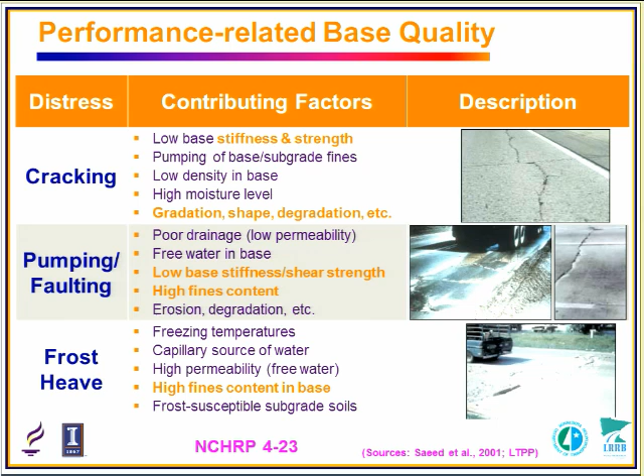According to the NCHRP 4-23 study, pavement distresses can be related to base quality, especially stiffness and strength. This summarizes some critical aggregate properties related to pavement performance. As you can see, shear strength and stiffness are among those aggregate properties, and gradation is almost related to all of the aggregate properties. That's why we need to have a better understanding of gradation mechanism.

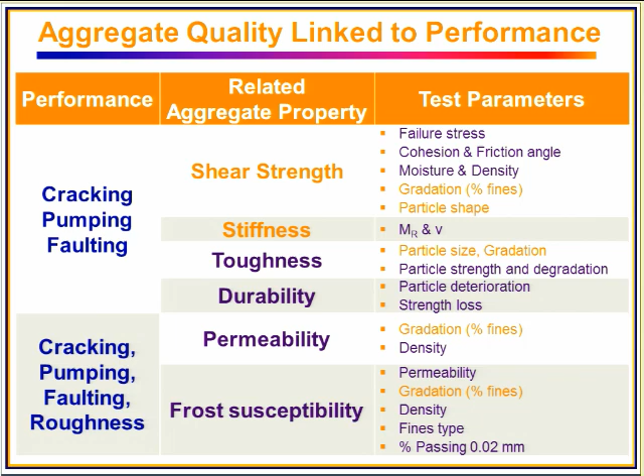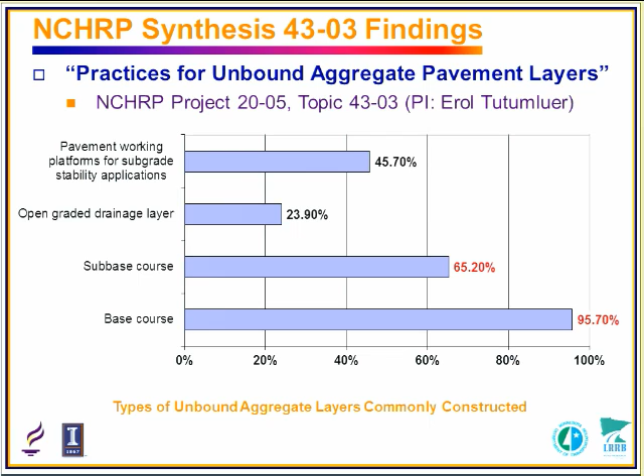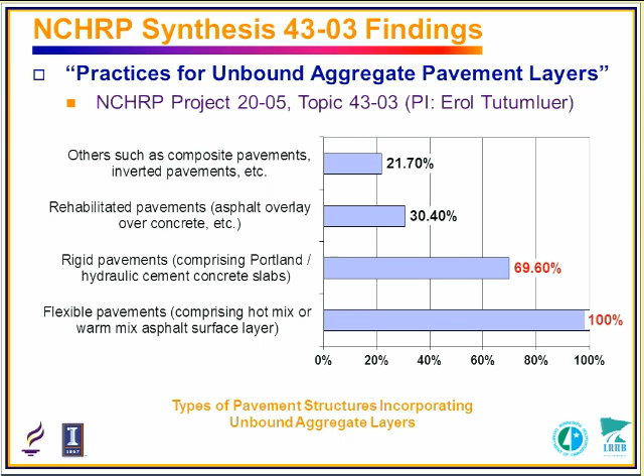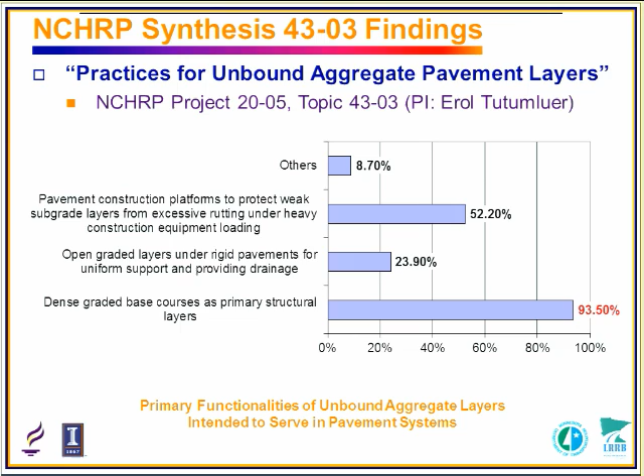Recently, there's an NCHRP synthesis completed by Professor Tutumluer and Deb. As you can see, 95% of the responding agencies construct unbound aggregate layers for base course. All of the responding agencies construct unbound aggregate layers for flexible pavements. It's interesting to note that about 70% of the responding agencies construct unbound aggregates for rigid pavements, and 94% of the responding agencies use unbound aggregate layers for dense graded course layer. So as you can see, unbound aggregate layers have a lot of applications in the pavement area.

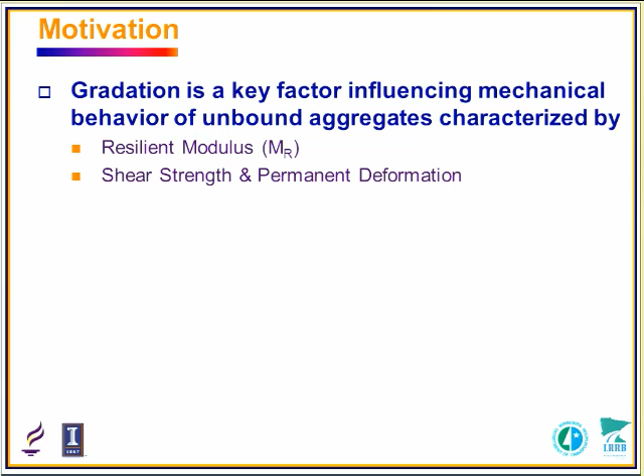Based on this, the motivation of this study is realizing that gradation is a key factor influencing resilient modulus, shear strength, and permanent deformation of unbound aggregates, so we need to have an in-depth and better understanding about the mechanism.

Current gradation specifications used by many transportation DOTs just specify gradation bands, and there are some improvements we can make to further improve those specifications. For example, there's no robust linkage to actual performance. We know that those gradation bands work well for some standard materials, but they will not guarantee good performance always. Sometimes we may have conflicting performance requirements—for example, to ensure stability, we may compromise the drainability or permeability. Another issue is how to distinguish between different gradations within that band. Recently, many state DOTs are facing problems using out-of-specification materials, so we need to come up with a justification to accept or reject those materials properly.

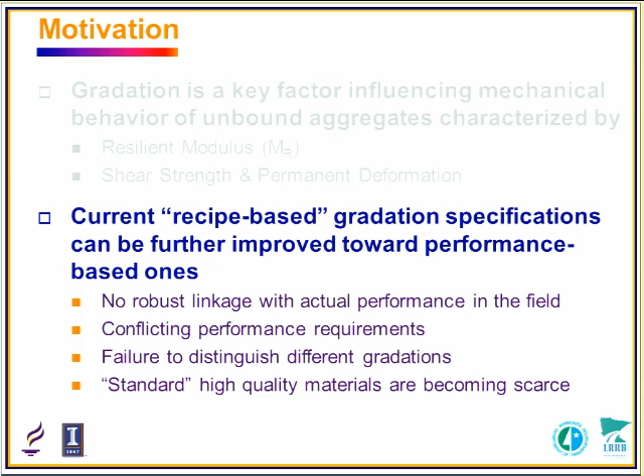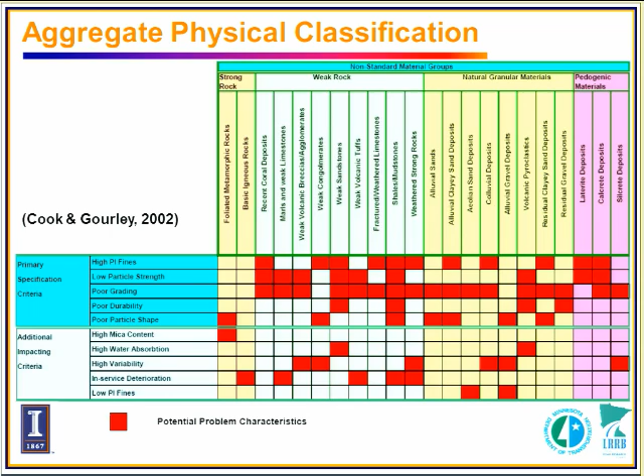Typically, unbound aggregates can be classified for different uses based on their physical properties, including mineralogy, type of rocks, and other features like high plastic fines, particle strength, gradation, durability, shape, as well as deleterious materials content, and so on. As you can see, those properties are very empirical in nature and may not have a strong indication of the mechanistic performance. That's why we need to pursue mechanistic classification.

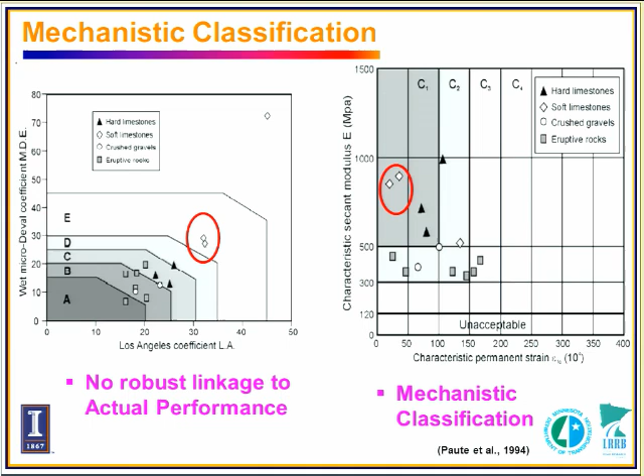Although mechanistic classification is good, in reality not every transportation agency has the capability to run experimental tests. According to this NCHRP synthesis, out of 50 states in the US, only about 10 or so run laboratory testing for unbound materials. That's why we need to focus on the mechanistic side, but still try to be practical as possible.

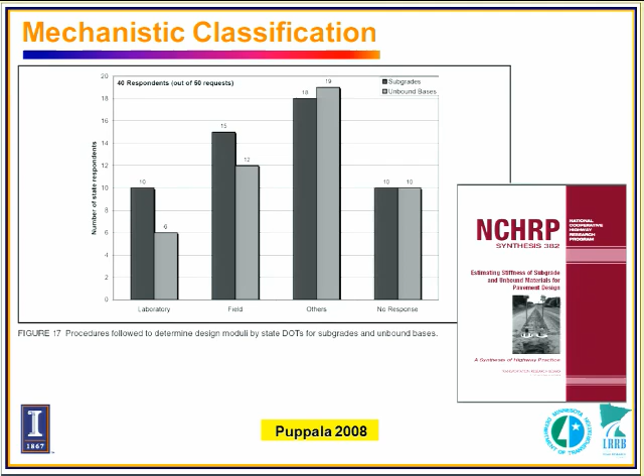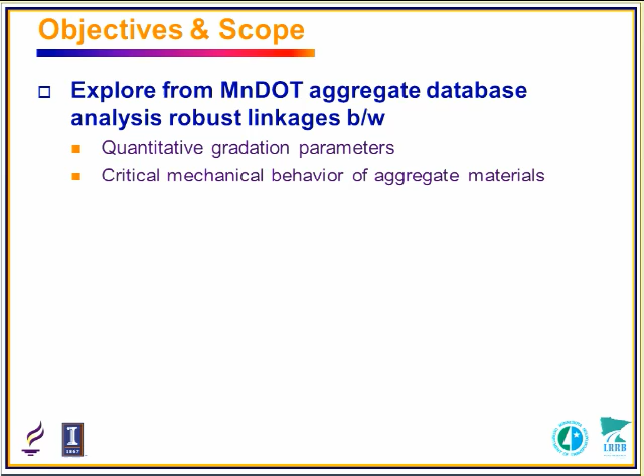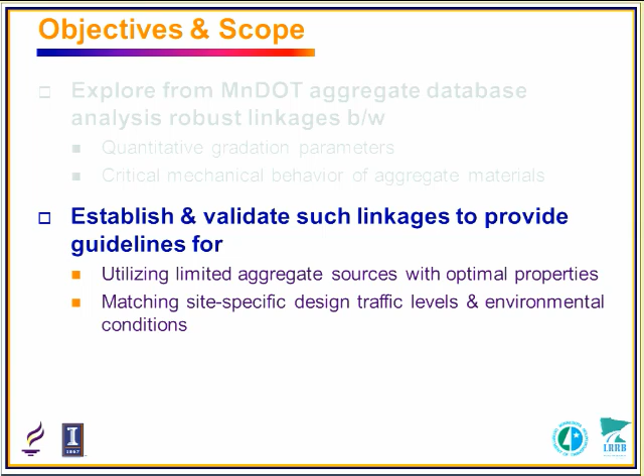Based on this, the objective of this study is to explore from a well-established Mn/DOT aggregate database the robust linkage between quantitative gradation parameters and the critical mechanical behavior of aggregate materials. The next objective is to establish such linkage and then validate it, so we can use this as a guideline to utilize limited aggregate sources with optimal properties to design pavement layers for site-specific design traffic level and environmental conditions. Another goal is to further develop performance-based material specifications.

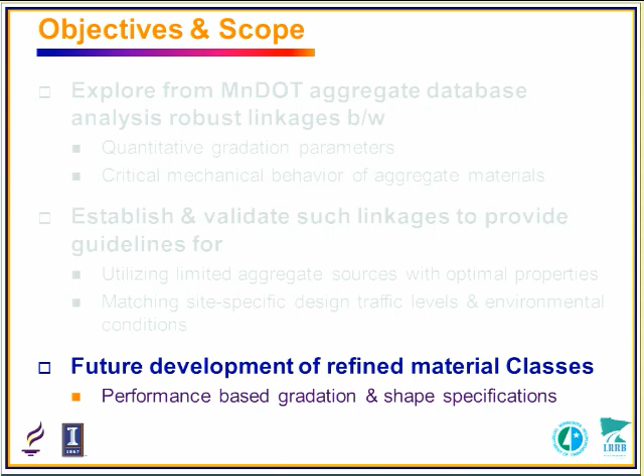Mainly, for example, at this stage we are focusing on the gradation and shape properties, trying to improve the current state Mn/DOT specifications.

Regarding the literature review, as you may know, these are several typical gradation types: well graded, gap graded, open graded. For unbound pavement layers in flexible pavements, we typically use well graded, dense graded materials. They have grain-to-grain contact, low air voids, and high density.

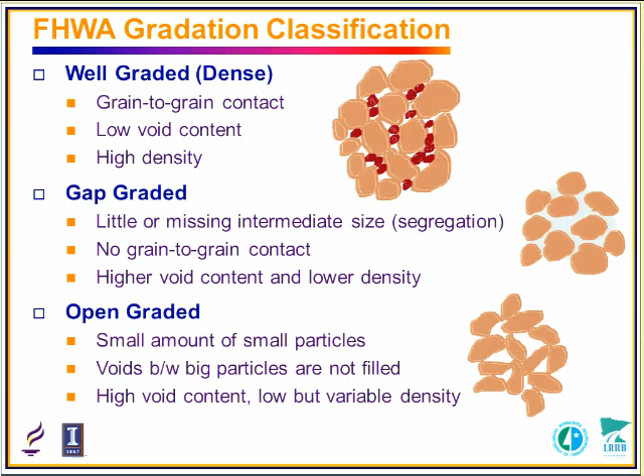Through the literature review, we can find a lot of gradation quantification methods. Here is just a sample of those, it's hard to be exhaustive. The most familiar one may be the Talbot equation, the maximum density line. Most of you are familiar with this.

The second one is suitable for materials generated by crushing, mining, and grinding. The USCS specification, Unified Soil Classification System, also classifies different sizes of materials into gravel and sand based on their definitions.

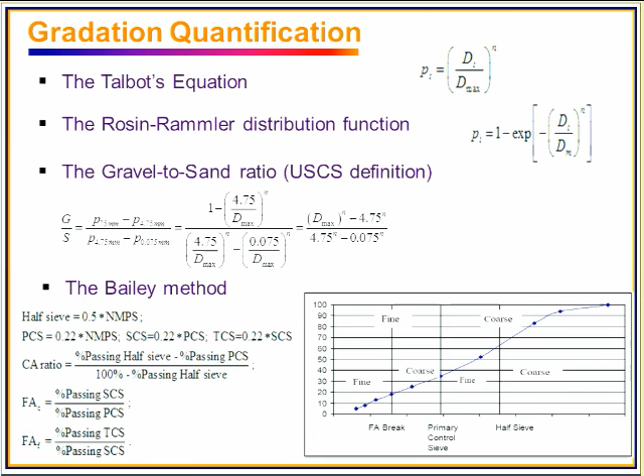And then we have the Bailey method, which is quite well practiced in asphalt mixture. Still, we need to explore the application of this method for unbound aggregates.

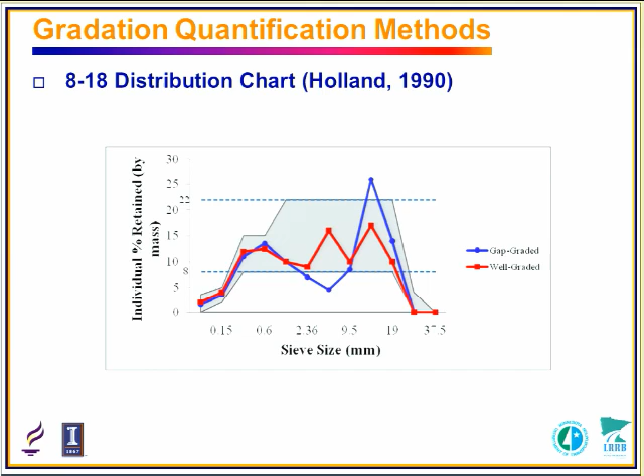For concrete mixture design, there is a method where distribution is basically just a plot of individual percent retained versus the sieve size. It's used quite frequently for concrete mix design. Another method for concrete mix design is the coarseness factor. Based on gradation, you calculate coarseness factor and workability factors, and then come up with different zones for different properties.

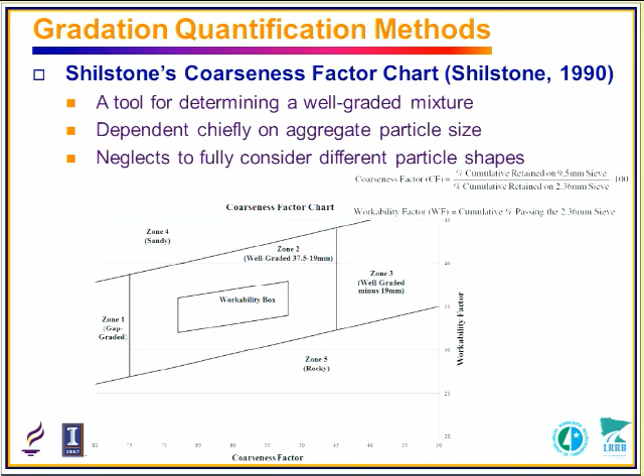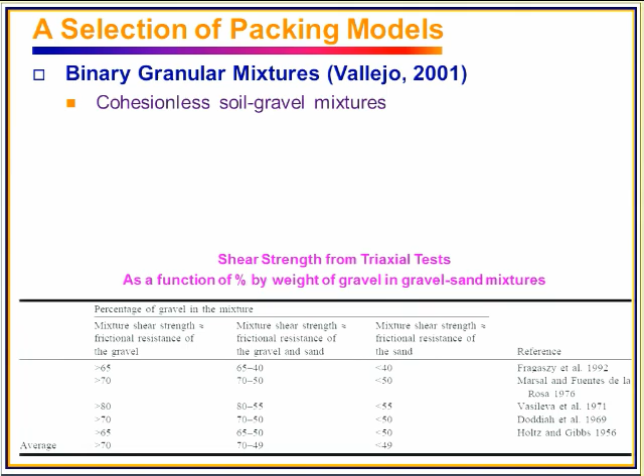In addition to those gradation quantification methods, there are a lot of packing models to describe aggregate packing. For example, in geotechnical engineering, for cohesionless soil gravel mixtures, there are a lot of triaxial shear strength test results. This table shows the shear strength as a function of percent gravel by weight in the gravel sand mixture.

As you can see from this table, when aggregate gravel fraction is greater than 70% by weight, the shear strength is mainly controlled by the gravel. If the gravel fraction is less than 49%, then the shear strength is mainly controlled by the sand fraction. So the shear strength depends on the relative concentration of the large and small fractions.

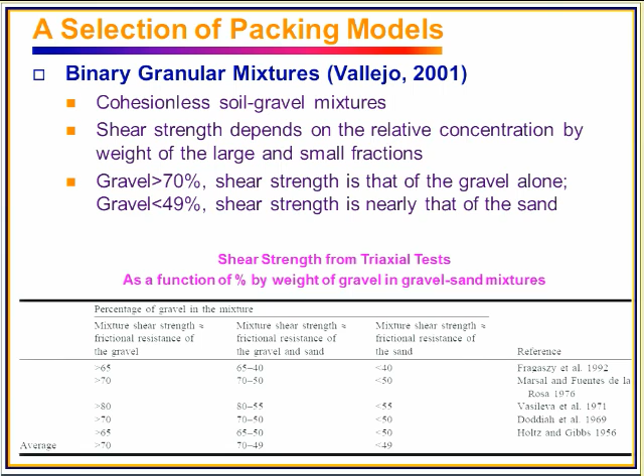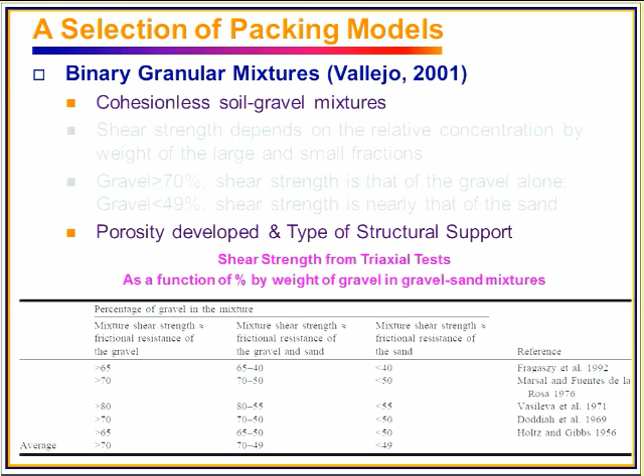The important thing to catch is that the porosity developed in the mixture and type of structural support are the critical factors for shear strength.

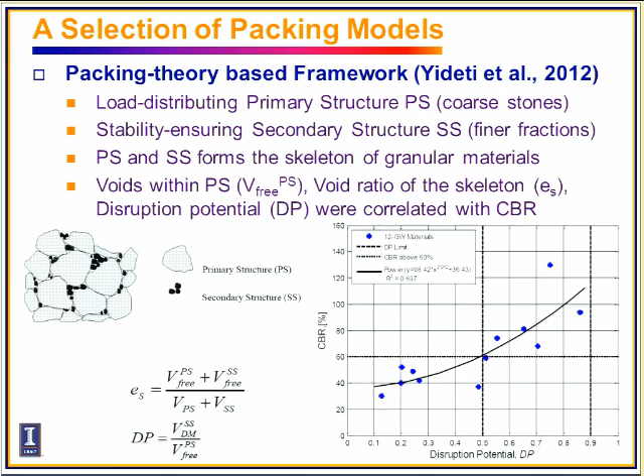A recent paper described the packing theory for unbound aggregates. You can see they calculate the aggregate packing into primary and secondary structures. Based on those definitions, they came up with several important parameters, like void ratio in the secondary structure, void ratio in the primary structure, as well as the disruption potential. They found that the disruption potential is well correlated to the CBR values.

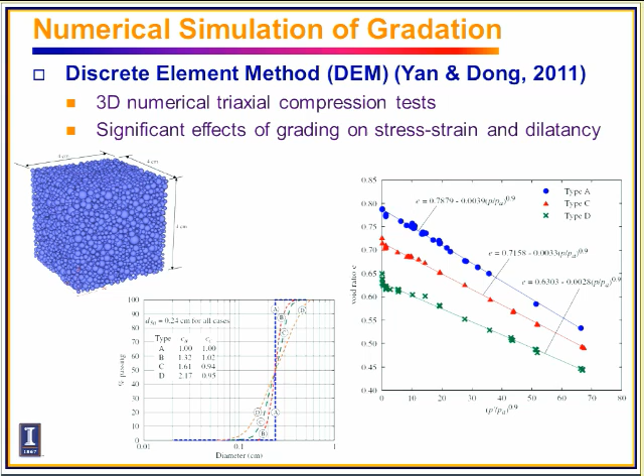The previous examples are mainly on the experimental side. There are a lot of numerical simulations to investigate the gradation effects. Discrete element method is a well-used tool because unbound aggregates are particulate in nature. In this study, they performed some 3D numerical triaxial compression tests to study the effects of grading on stress-strain behavior and dilatancy behavior. As you can see from this figure, there are some significant differences in terms of gradation change. This just gives you some examples, and I'm not going into the details of those studies.

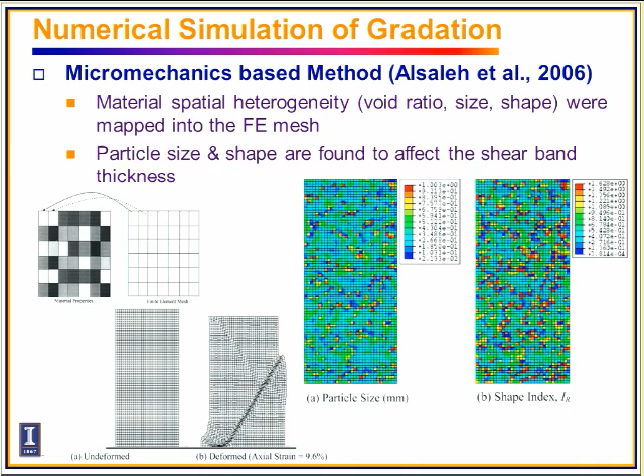Another thing is that we can use micromechanics-based methods to quantify the material spatial heterogeneity. As shown in this example, they can map material property variation into the finite element mesh, and based on the spatial distribution of particle size and shape indices, they come up with a micromechanical-based framework to quantify the influence of those variables.

Giving some information about this project and as well as some literature. So now I would like to move on to the database we collected.

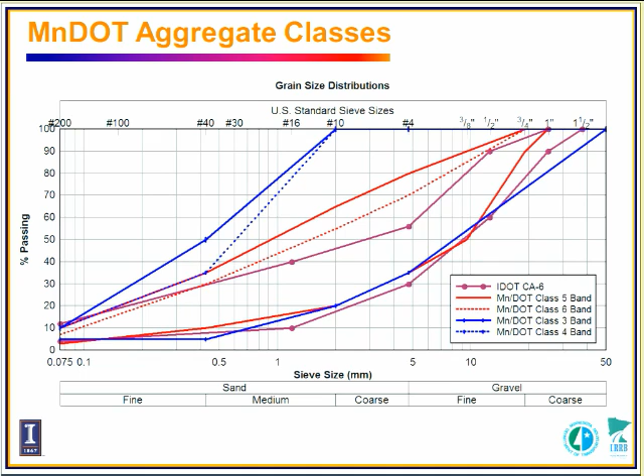Before describing the database, I would like to give some introduction about the MnDOT specifications. This shows the gradation bands for different classes specified by MnDOT. For your reference, IDOT CA-6 is also included.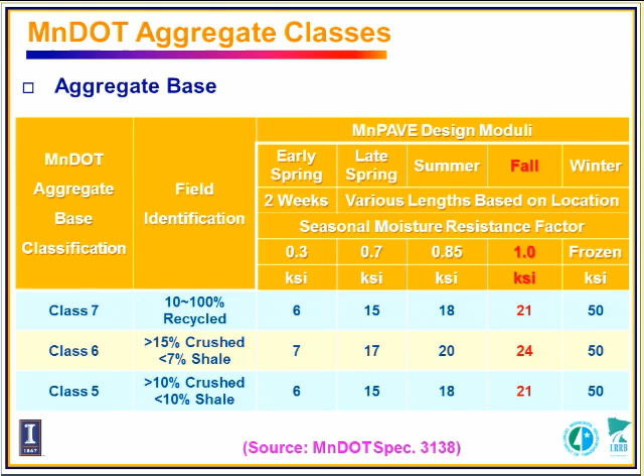For granular subbase, mainly like class 3, class 4, select granular.

So the database we collected includes both the resilient modulus and the shear strength. They tested virgin materials as well as recycled materials. Those materials were collected from different construction project sites, or generated for specific research studies at the University of Minnesota. So basically, it's a variety of materials.

Some of the materials are tested in MnDOT central lab, some of them are tested in the U of M lab, but eventually it's compiled into a huge database. So we were able to collect this database and use it for our purpose.

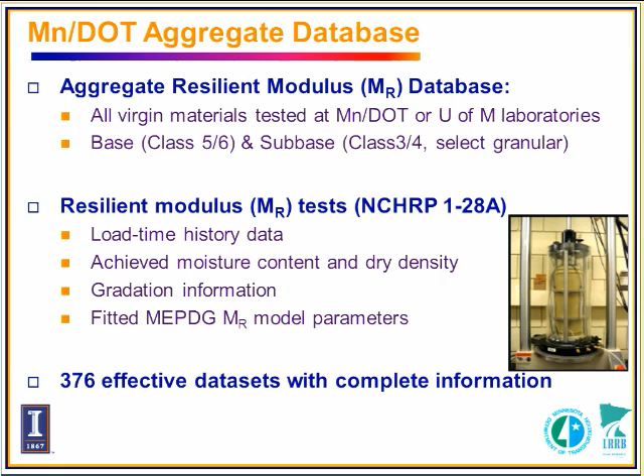It's good to emphasize that the resilient modulus test they have done follows the NCHRP 1-28A procedure. They also have the shear strength test results. Basically, at the end of the resilient modulus test, they failed the sample to collect the peak deviator stress at failure.

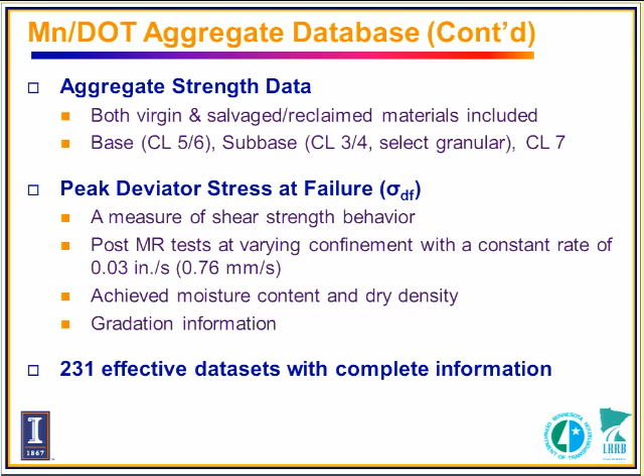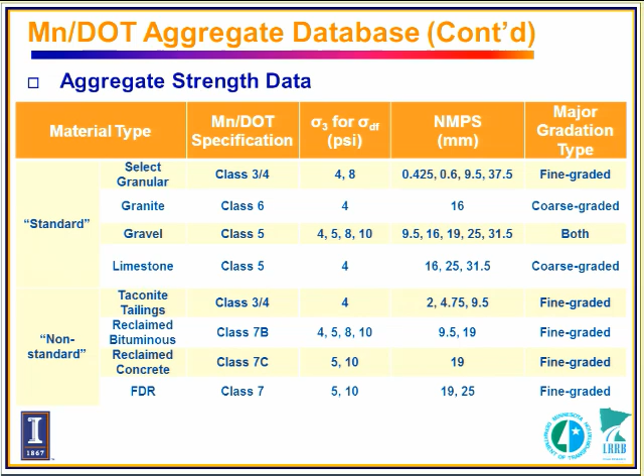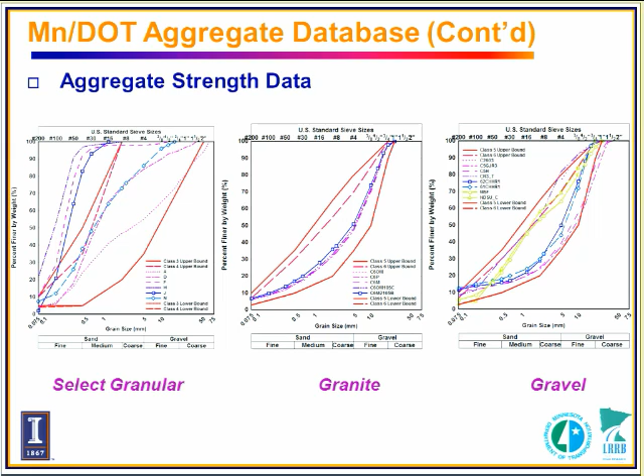Because it involves different types of gradations, we were able to have the opportunity to analyze the gradation effects. This shows the gradation of those materials. As you can see, for each type, some of the gradations may be out of the band, so may be considered out of specification. You can see some variation in the gradation for those different materials.

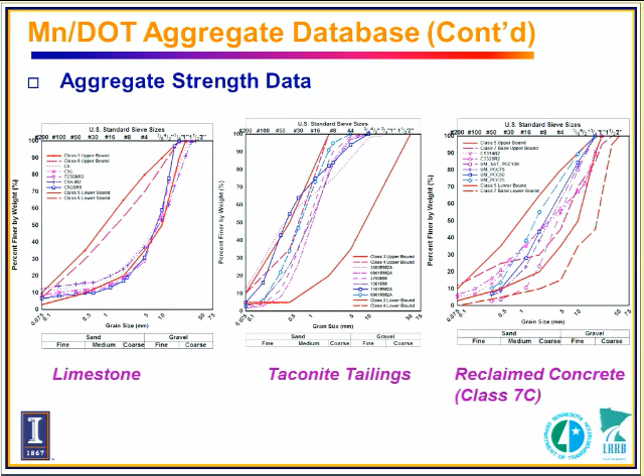So after that, I want to go to the analysis results. It's important to emphasize that because those materials are tested at different labs and collected from different project sites, there may be some variation inside, and in order to try to minimize the variations, we eliminated some data sets.

For example, we stick to the data sets which have optimum moisture content fluctuation around 0.5%, and relative compaction level within 99 to 101%. Some data sets not following this requirement we didn't use, just to make sure that the samples we started with are approximately at the optimum condition.

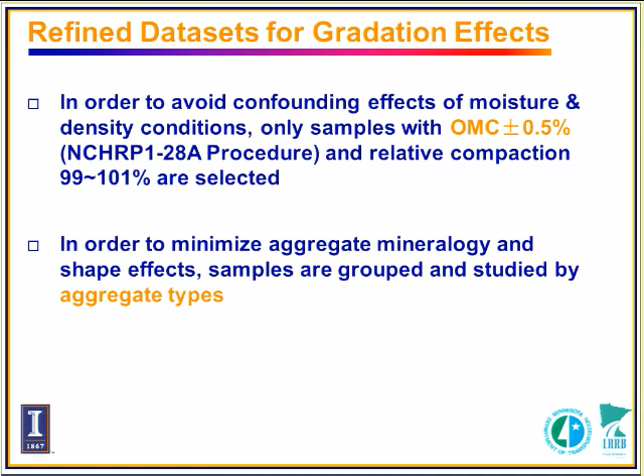As well, in order to minimize aggregate mineralogy and shape effects, we grouped each sample according to their aggregate types.

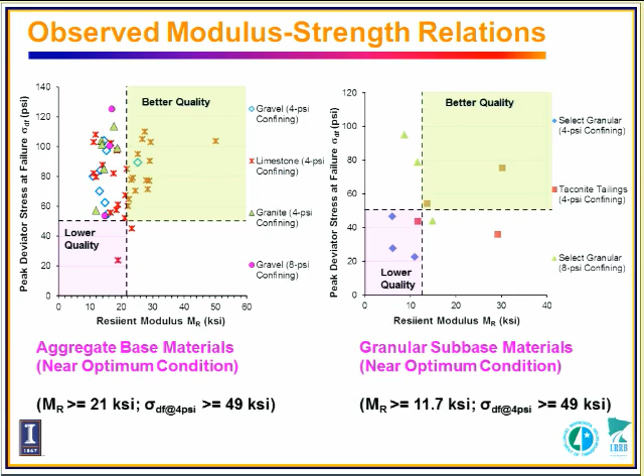Once we have all the gradation, we categorize the gradation based on previous methods to calculate quantitative gradation parameters, and then we try to correlate those gradation parameters to shear strength.

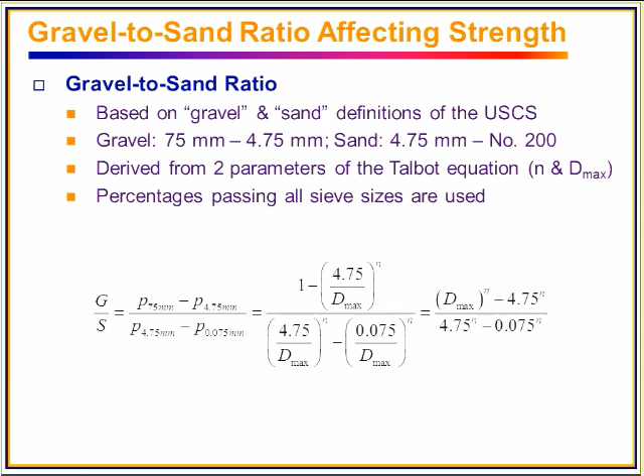After some statistical analysis, we found out that this parameter, gravel to sand ratio, calculated using this formula, has a much better correlation with shear strength properties. This shows some results regarding how this parameter affects the strength.

After some data analysis, based on our data analysis and the previous literature, we came up with the finding that there is an optimum range for this value to achieve the maximum shear strength.

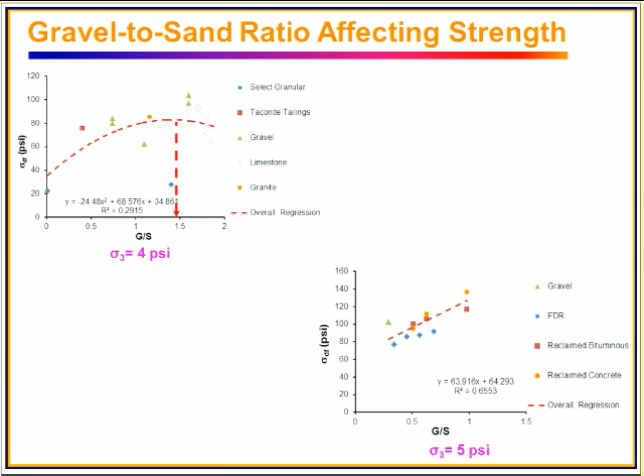Instead of going into details here, I'll just quickly summarize some results. After some data analysis, we found that for MnDOT materials, this range is typically around 1.5 to 1.7. As you can see in the above figure, for GS ratio around 1.5, the peak deviator stress at failure is kind of maximum. The bottom figure shows that as the GS ratio approaches 1.5, peak deviator stress increases.

So the trend is kind of obvious for the bottom figure, but for the upper figure, it's not that obvious, because it involves some recycled materials.

But according to Kim and Labuz's study, there should be some difference in their shear strength behavior. So we were guessing that the similar peak deviator stress at failure may be due to the GS ratio, because if you reach the optimum GS ratio, the shear strength behavior can be improved.

This is an assumption we made, and then we tried to confirm this assumption from our own database and external databases.

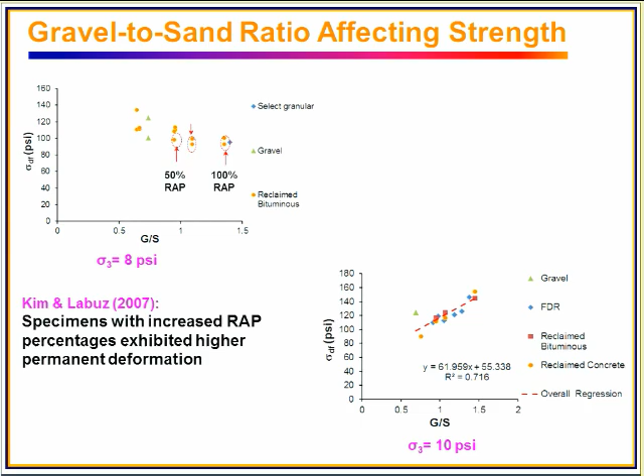Before I move on to the validation stage, I want to give a quick explanation about this parameter. We consider the mixture as gravel size and sand size based on the USCS specification. Gravel size means passing 75 millimeter and retained on number 4 sieve size.

Sand size means passing number 4 and retained on 75 micrometer. As you can see, if we have a large GS ratio, that means gravel size dominates in the mixture, and the sand size just fills voids between those gravel particles. So there should be some optimum range for each specific gradation.

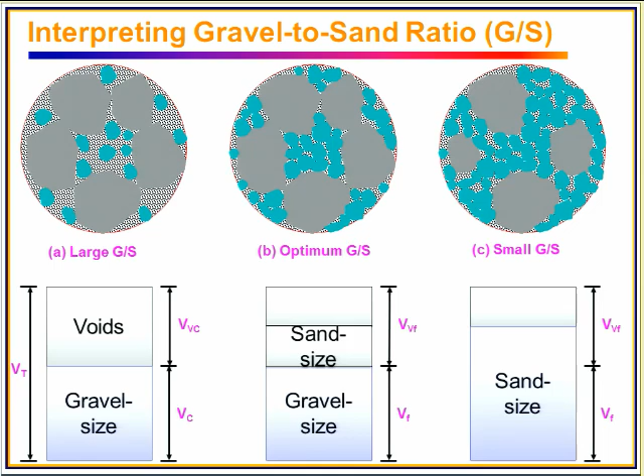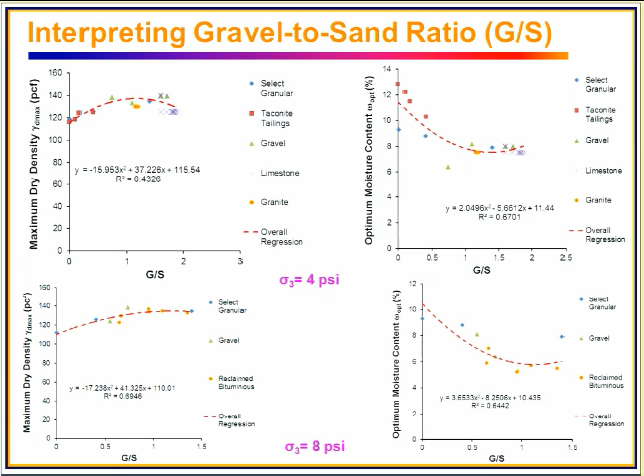So based on this database analysis, after some statistical analysis, we came up with this range of about 1.5. Then we try to use some other databases to validate this range.

As you can see from these results, we only studied the samples at the optimum condition, so we eliminated those samples that were not at the optimum, because some of the samples were studied for moisture effects, so their moisture level and density level were not around optimum, and we didn't use those.

As you can see from the left figure, as GS ratio increases, there's a decreasing trend in the optimum moisture content, as well as an increasing trend for the maximum dry density.

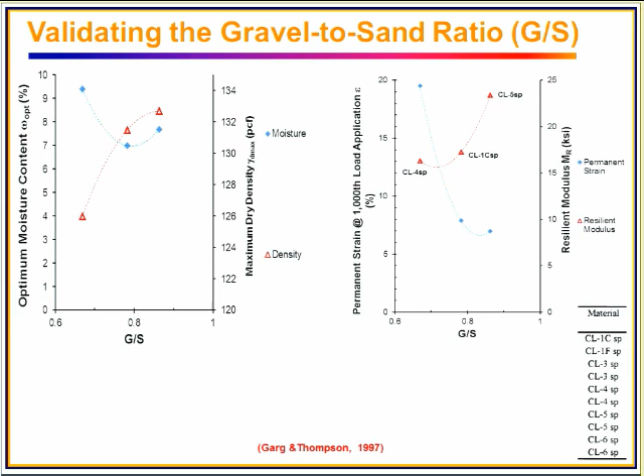We collected one database from University of Oklahoma, I think that was completed in 1998. They studied sandstone and limestone, two different types, with different gradations. So we also used this database.

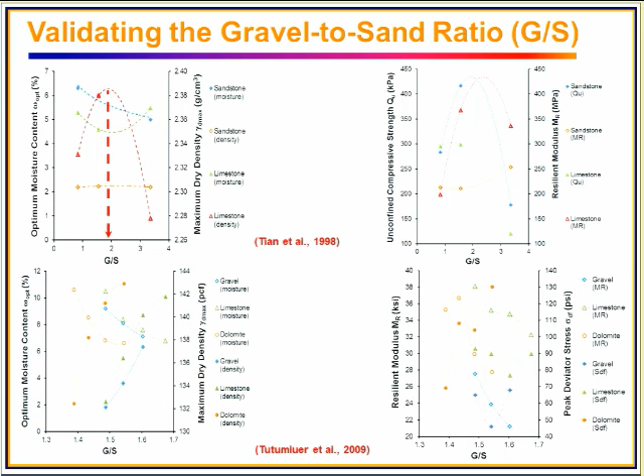The previous slide shows we established this optimal range for this parameter, and then we tried to validate this range using three external databases.

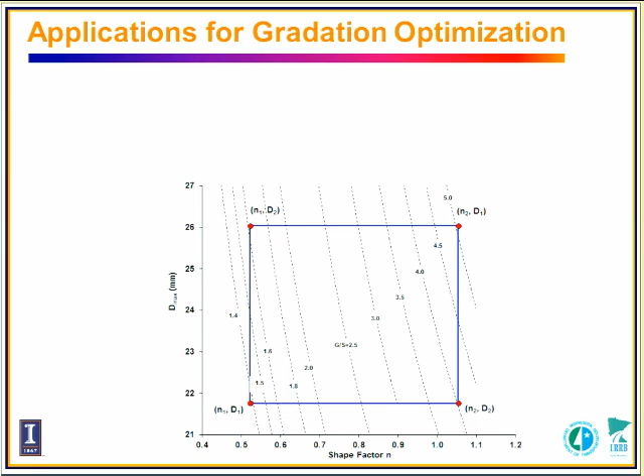Here's an application of this gradation optimization method. This shows an example of class 5 gradation bands. Based on the upper bound and lower bound of this gradation, we can calculate the GS value for this gradation band. Each point here represents a gradation curve, because we can fit this curve using Talbot's equation and calculate the GS ratio based on the formula we came up with.

These contours represent different GS ratio values. Based on our study, 1.5 to 1.7 is the optimal range for shear strength behavior.

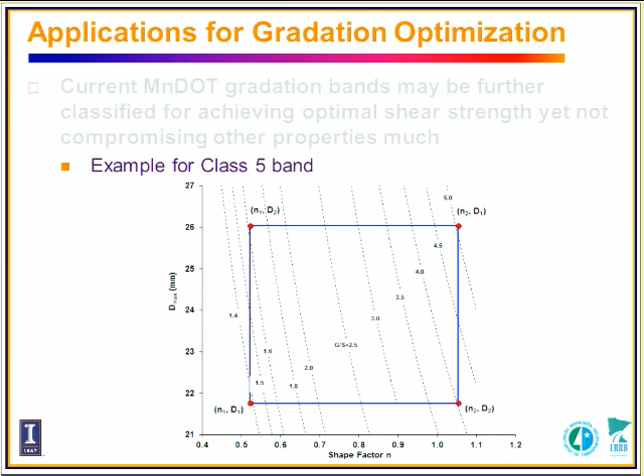So for once we have a gradation, we can try to calculate this value and give us a quick idea about how much shear strength, how better the shear strength behavior is for this specific gradation. Once we validate this method, we don't need to run lab testing for each gradation every time. That's the main logic behind this method.

Then I will talk about the conclusions. Based on the previous figure, you can see that the modulus strength doesn't always have a unique increasing or decreasing trend. So we found that it may be inadequate to establish aggregate quality based just on the resilient modulus.

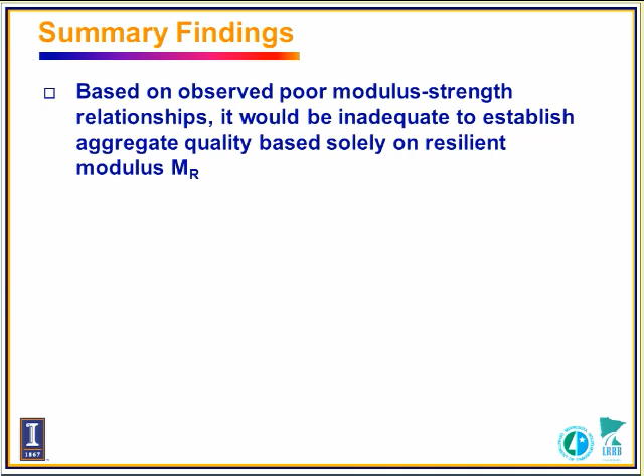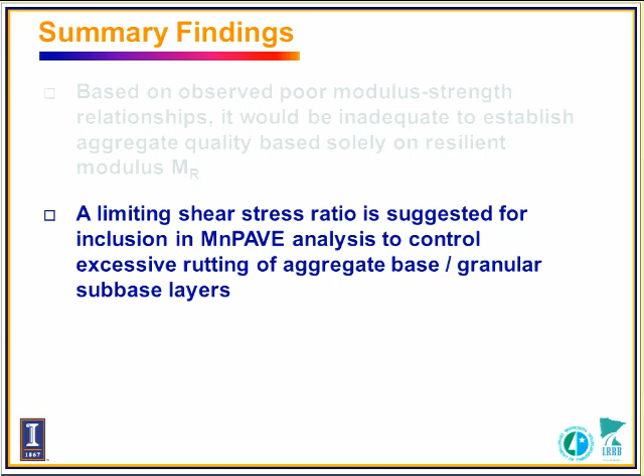Especially in the MEPDG guide, they recently focus on the resilient modulus side, but regarding the rutting behavior and the shear strength, I think we need more inputs to quantify those behaviors. To avoid rutting failure, we came up with a limiting shear stress ratio and suggest its use in the future.

Gradation effects on the shear strength behavior were quantified from this GS ratio, and the optimal range found for MnDOT aggregates was around 1.5, based on the AASHTO T99 standard compaction. This value was kind of verified using 3 external databases.

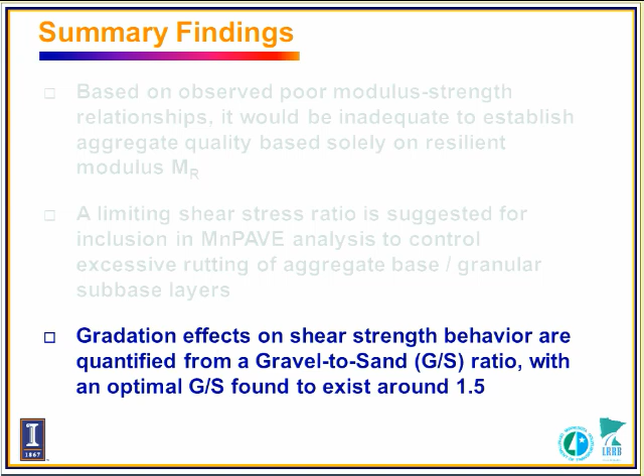Here shows some application of this method. MnROAD test section 13 is kind of under reconstruction, so...

They request unbound aggregate base for this recycled PCC pavement. This pavement structure is like 7.5 inch PCC and 7.5 inch 100% recycled. For this material, it's required to have better shear strength behavior and draining behavior, as well as to maintain the durability.

So using this framework, we came up with a gradation and sent it back to them, and hopefully we can get some instrumentation data and feedback from the real construction. Then we can further validate and refine this framework.

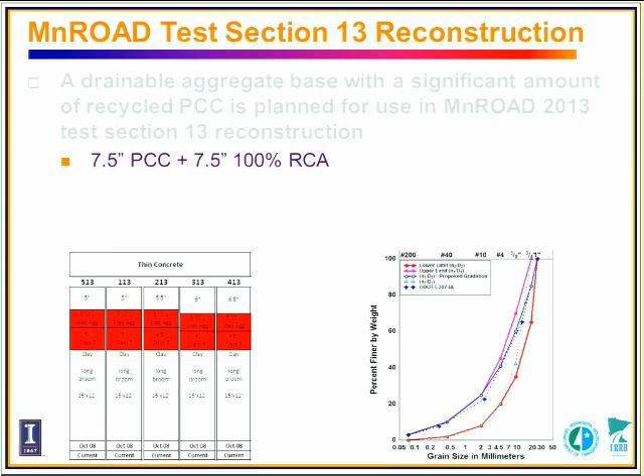Another thing we are working on now: since we identified this parameter mainly from experimental investigation, we are still in the stage to further validate this framework. So we pursue to utilize the discrete element method. We already have a well-established database from 2008, completed by Professor Tutumluer and his student. This study investigates 6 different types of aggregates, just one gradation, with different shape effects.

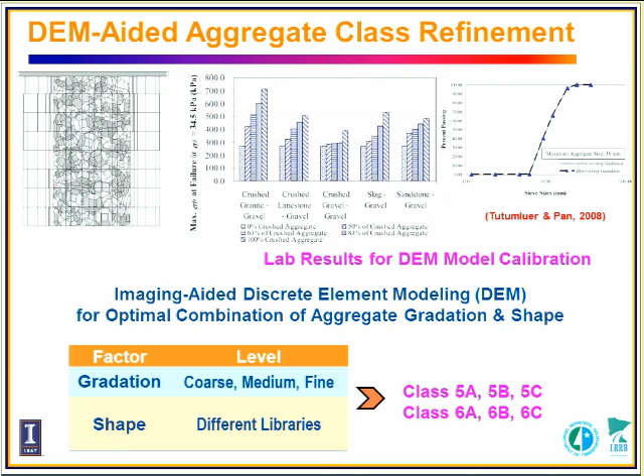We are hoping that we can calibrate the DEM model parameters using this database. Once the DEM model is calibrated, we can use it to study different combinations of shape and gradation to further refine the current MnDOT specifications.

With that, I would like to thank you for your attention and welcome any questions.